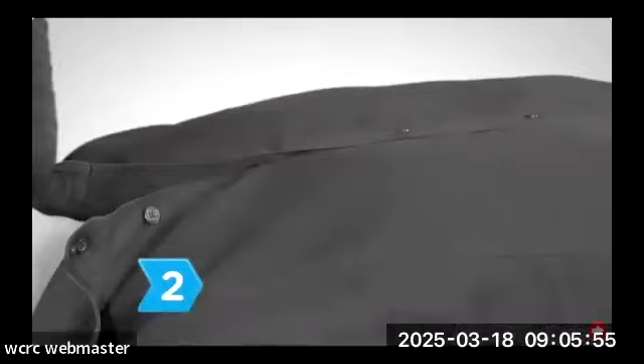Step 1. If you see someone suddenly collapse, check the scene for safety and then see if the person responds by tapping them on the shoulder and shouting, 'Are you okay?' Step 2. Briefly look for breathing. Step 3. If they don't respond, call or send someone to call 911 or the local emergency number right away. Step 4. If the person is not breathing or is gasping, prepare to give chest compressions.

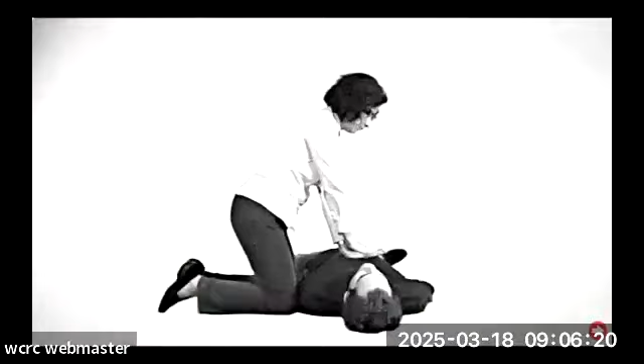Kneel beside them and put the heel of one hand on the center of their chest. Place your other hand over that hand, lacing your fingers together. Position your shoulders directly over your hands, keeping your arms straight and your fingers off the chest. Step 5. Push hard and fast, at least 2 inches. Then let the chest rise completely before pressing down again. Don't take your hands off the chest, just your weight.

Step 6. Keep going. Do not stop compressions until the person shows an obvious sign of life like breathing, the scene becomes unsafe, an automated external defibrillator (AED) is ready, you're too exhausted to continue, or a trained responder takes over.

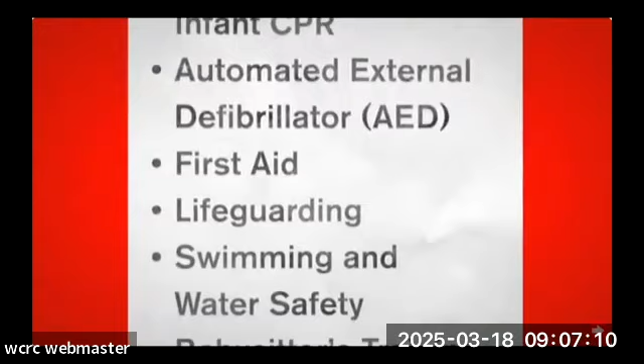Step 7. Get training and encourage others to do so by taking an American Red Cross health and safety course. Knowing full CPR, chest compressions, and breaths will enable you to help in other emergencies such as drowning and choking. Every household should have at least one person trained in life-saving skills. Did you know? Most people who survive a cardiac emergency are helped by a bystander.

All right. It's pretty quick and easy to learn.

Just 2 steps: dial 911, or have a bystander nearby dial 911, and then push hard and fast in the center of the chest. Right around 100 compressions, or 100 beats per minute, is what you're aiming for. There's a laundry list of songs out there that are 100 beats per minute, the famous one being 'Staying Alive' by the Bee Gees. There's a list on both the American Red Cross website and the American Heart Association website to help you get that rate locked into your head.

I do have mannequins available that we could practice on. I'll set those up at my desk over in the administrative wing. So if you want to get some hands-on experience, or just refresh what it feels like for those hands-on skills, I'll be in my cubicle all morning, and I would invite you to come over and check it out.

Craig, could you update the board on the type of training we provide for our staff? Sure. We do a full American Heart Association CPR course, as well as a first aid course. The first aid section is required by MIOSHA, so to maintain compliance with MIOSHA standards, we offer that to our employees.

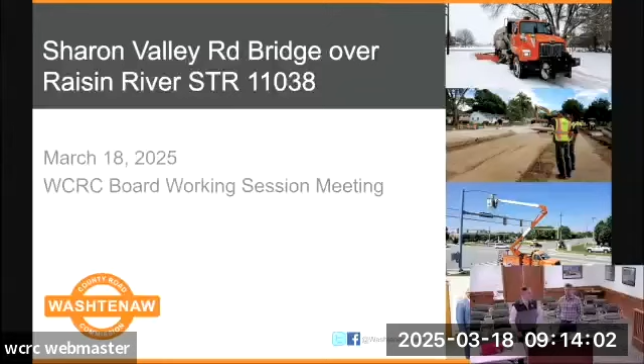Good morning. Aaron Burkholz, Assistant Director of Engineering here at the Road Commission, and Nate Murphy, Senior Project Manager for Design and Construction. We're here to talk about the Sharon Valley Road Bridge over the River Raisin, structure 11038, and give you an update on where we are on the design for that structure.

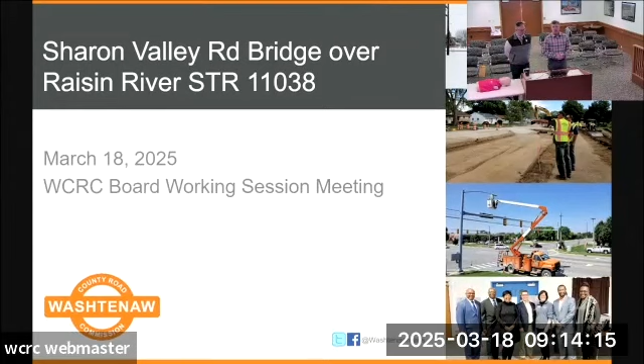Going back in time to when we started this project, we applied for funding through the MDOT local bridge program. This was back in 2021, and through that process we were awarded 1.9 million for the replacement of the structure, to be done for fiscal year 2025. That award included federal and/or state funding sources, and there's also a local MTF match.

So we're currently working toward the design for this one. The MDOT fiscal year runs from October 1 to September 30, so we have to get these monies obligated prior to the end of that season. As long as we're obligated, we're working toward getting the MDOT bid letting in October of this year, October 2025.

For us, that obligation of the funds is when the money is secured, when the money is in the bank. That occurs after we make our final submittal to MDOT, after we submit the final plans, proposal and estimate. Between that time and when the bid is opened is when obligation occurs at MDOT. Again, this is fiscal year 25 funding, and it can include federal and/or state funding for this type of program.

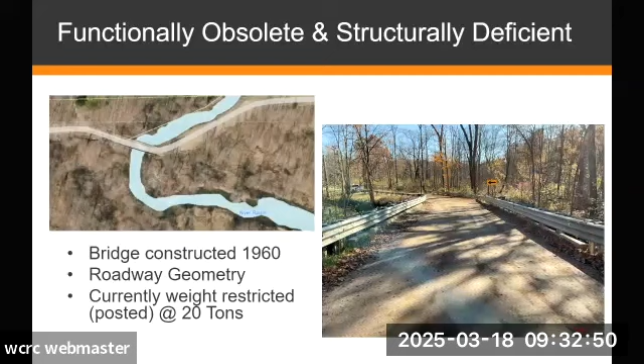The bridge is structurally deficient as a result of the deterioration of the beams. The beams are concrete, and due to the cracking of the concrete in the beams, they have been deemed deficient.

There's also an issue with scour. You can see it in the aerial picture of the bridge looking down on it. As the river comes around that corner and makes that turn, it causes scour around the bridge. That also plays into the fact that we required a 6-month inspection for the bridge.

So it's functionally obsolete and structurally deficient. It does not meet the requirements for either of those. That does present a liability, as Rod was bringing up, that we have a bridge that doesn't meet those requirements.

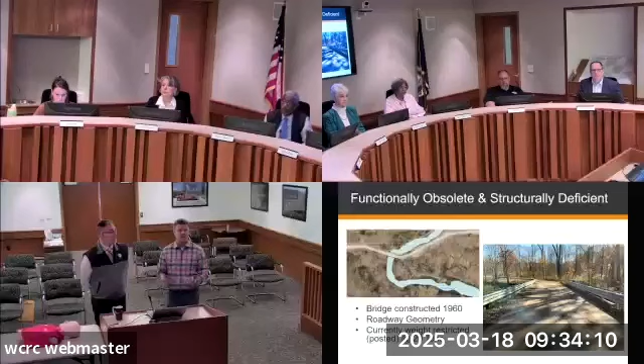So we want to have a bridge that we're not keeping track of every 6 months. The failure that happened in Ohio mandated federally that any bridge over 20 feet in length be inspected every 2 years. We really don't want a bridge that needs to be looked at this often.

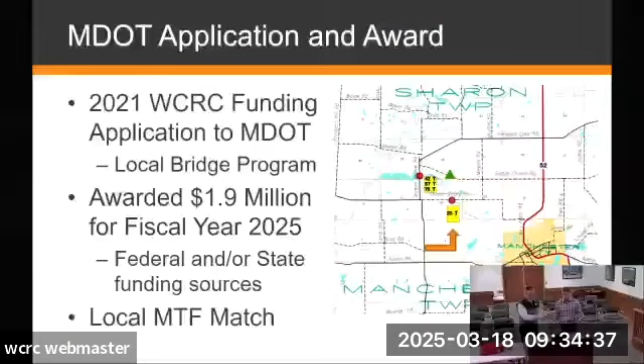So that plays into why we picked this one as well. There's a lot of factors that this one needs help with. One other thing I'll mention is it wasn't uncommon in the past, looking back historically, where...

As they were constructing these bridges, they would look for the shortest span across the river and say, okay, here's the shortest place to cross, that's the easiest way to get across. So we're gonna build the bridge here and then figure out where the roads go. I'm guessing that's what happened here, though I don't know for sure—that's my theory.

For the time this was built, back in 1960, they probably felt it was sufficient. They thought, this is a country road, this will be fine. But as we've advanced to more modern times, we really can't accept a bridge with this type of alignment. It requires a lot of attentiveness on the part of the motorist, coming down a steep hill and going across a narrow bridge, to realize they need to make a pretty sharp turn right off the end of the bridge.

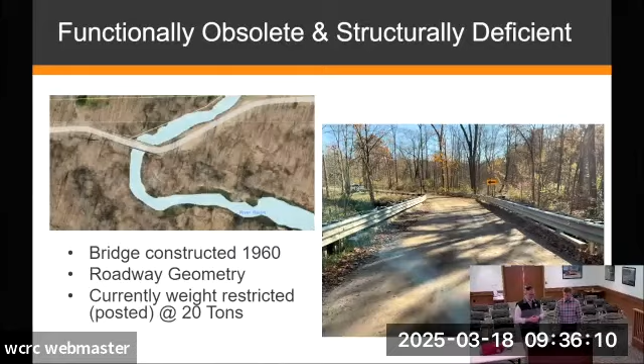We'll get more into the design, but functionally obsolete and structurally deficient are terms we use within engineering. We try not to get too far into the details, but we just wanted to highlight that.

Commissioner, I'm sorry, Commissioner Green? Yes. If someone exceeds the weight restrictions that are posted, is that something our ordinance officers attempt to enforce?

Yes, so if we have a weighmaster in the area and the weighmaster observes an overloaded vehicle, one that would exceed 20 tons, they can stop that vehicle and weigh it. But again, it's very difficult to catch that type of thing, particularly on a bridge located like this one, out in a very rural area.

Usually if we're going to catch an overload on a bridge, it's because it's been repeated over time, and we hear from the public that there are vehicles going across this bridge that appear to be over the 20-ton weight limit, and you might want to have somebody keep an eye on it.

So again, there's that inherent concern that we have a bridge that structurally cannot carry current highway loads, and that's ultimately what we need. Even though this bridge is in a very rural area, you want to consider there's a lot of agriculture in this area, and that equipment can get quite large.

And we don't have a lot of crossings here—we highlighted that in the first slide. There are not a lot of east-west crossings. Unfortunately, we have a closure on Bethel Church just to the north, and the next crossing of the River Raisin to the south requires going all the way through the city of Manchester and across the bridge downtown. So even though this bridge is in a country setting, it has quite an importance to the area and being able to move around.

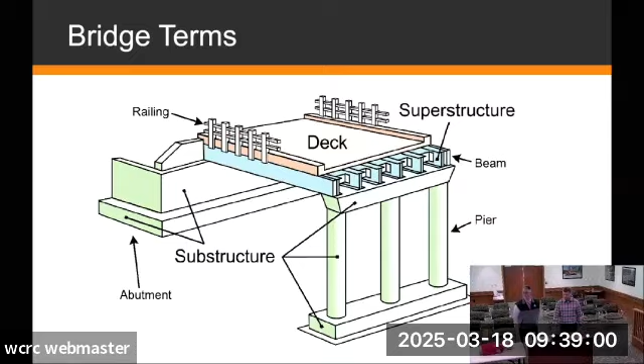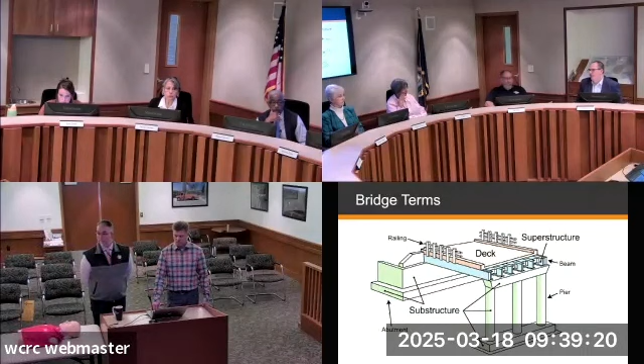Hopefully that clarifies things if we use a term. This bridge, the replacement, will not have a pier, but this is just to show you the terms. We would have a single span structure for this one. A lot of our local bridges are single spans. An example where we do have piers is Dixboro Road by St. Joe's Hospital - probably our largest structure in our system, where we span over the Huron River. It does have multiple piers. But most of our local bridges are single span, meaning you go from one abutment to the other and clear whatever water course you're going over.

To clarify also for weight restricted and bridge scour - weight restricted on this bridge, as I mentioned, is due to deterioration of the concrete beams. The other issue I mentioned was the scour at the abutment. Here's a picture to clarify that. This is not our bridge, but it shows where scour has affected the function of the abutments, and closing this bridge - you can see the water action has removed the backfill behind the abutment. That is the concern we have with this one, having the 6-month inspection cycle.

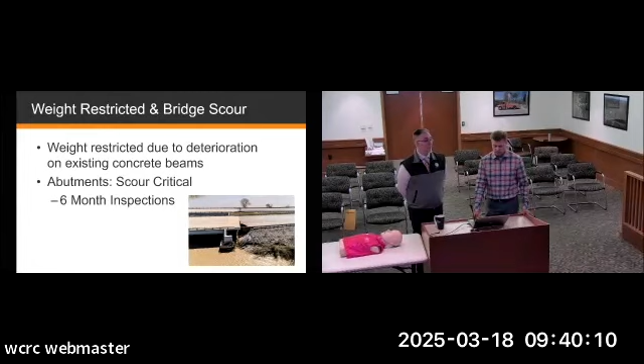In an area where the river turns, much like the one we're citing here, this picture illustrates the power of water, right? The high water levels and velocity can really take a toll on a structure. You can see the water got so high and the scour, as we call it, creates an erosion of the structures behind - this is even behind the abutment. So you're eroding behind the abutment where the beams are performing, but then it risks the integrity of that abutment. The abutments are basically like the foundation of the bridge. So if the abutment's at risk, a lot of our load limiting factors on local bridges are because of the condition of the abutments. That's where scour can be very powerful, and that's where a lot of the guidelines say if there's a risk of scour, you have to look at it more often.

Did you have a question? Yeah, so is this the bridge? No, this is just an example - example of the power of scour. Can you enlarge that picture? Oh, thank you.

This was an extreme example that really illustrated what scour can do to a bridge. There is not this level of scour at the existing bridge on Sharon Valley Road, but again, we just wanted to draw attention to what scour is.

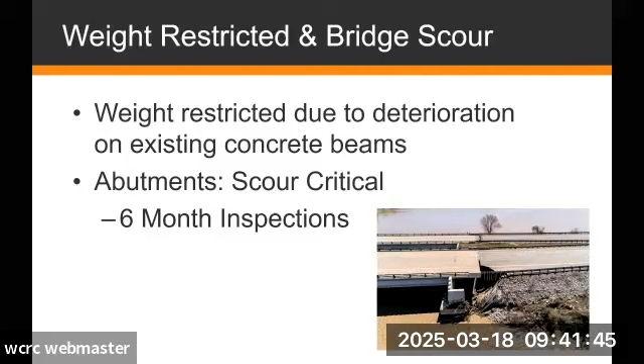Commissioner Green? Yes, what is scour? So scour is basically the action of water, the power of water. As it's going along the foundation of the bridge, it starts to pull material away from that area. Ways in which we account for scour in new bridges as they're constructed is we drive foundation piling - essentially what you're doing is nailing the bridge into the underlying soils. So if there's soil lost around that abutment underneath the beams, you still have those pilings, those foundational supports, to hold the bridge in place. But basically scour is the action, the power of water over time - it's pulling soils away from the bridge.

At Sharon Valley, the existing bridge, as the river comes underneath it, there's a sharp turn, and so you see scour along the outside - we call it the outside of the current. It's working its way around and pulling that material away, so it starts to erode and undermine the bridge foundation. You'll hear the term erosion - that's the one I often hear, and ultimately that's the effect. Thank you, great explanation, thank you.

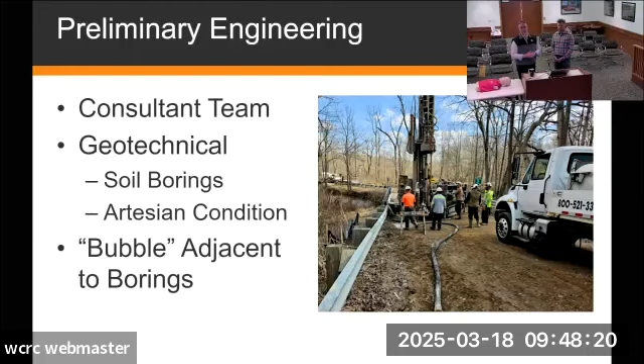Do you know what type of soil it is off the top of your head? Sandy loam? Is it clay? There's a lot of clay, and weathered shale down there, but that's well below the surface. I don't remember all the different layers, but yeah, there's a lot of clay out there.

Commissioner Green, I'm sorry, didn't see you. No, that's okay. So typically the soil analysis takes place prior to the design?

Yes, that's right, because you need to know the bearing capacity of those soils. It's a very important element in the design process so you can properly design the foundation and the abutments. Different types of soils will factor into things like the length of piling you need to drive into the ground. So knowing the soil type ahead of time is a big factor in the design.

Following along with the soil borings, we start working on our EGLE permit. As part of this, EGLE required us to provide several alternates to balance the environmental resources out there, meaning their resources include streams, threatened and endangered species, the river itself, and wetlands. Balancing the impact to those resources is a big part of what they're after. So they required us to provide several alternates for the layout of the new bridge.

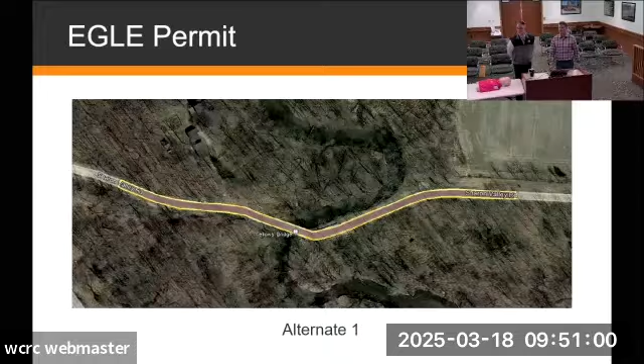You wouldn't have any impacts on the natural features. However, because the funding requires us to meet a low-volume AASHTO road standard, the curvatures need to be enhanced so you're not dealing with all the challenges vertically and horizontally along with the bridge at the same location. So, not a viable option.

We're not trying to design this to a highway standard. They have a low-volume road standard you can use for bridges such as this, where you have very few vehicles using it compared to a highway. So they do relax those standards, but even so, this option does not meet the requirement for low-volume roads.

Alternate 2 is shown here. This is actually the one our consultant and our team came up with as the most viable. This would move the bridge just to the south of the existing one, flattening out those horizontal curves and making a smoother transition between each direction. It takes that sharp curve out, and you can see the bridge is wider. We'll talk about the cross section of the bridge, but it is wider than existing, and that's a requirement of the same standard.

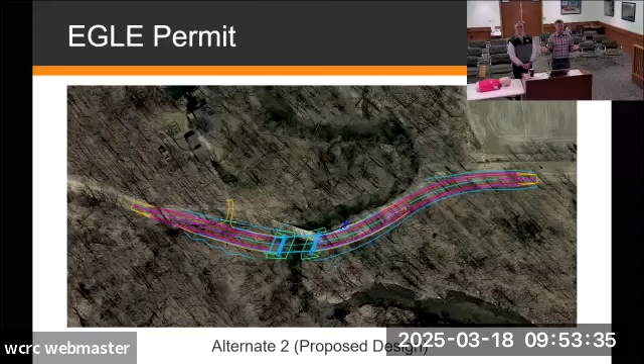As we provided these various alternatives to EGLE, they were reasonable in discussing them and recognizing not only the environmental impacts of a proposal like this, but the cost and the property impacts. So actually, they were pretty good to work with through this. They arrived at the same conclusion that we did, that the design Nate showed previously was the preferred alternative.

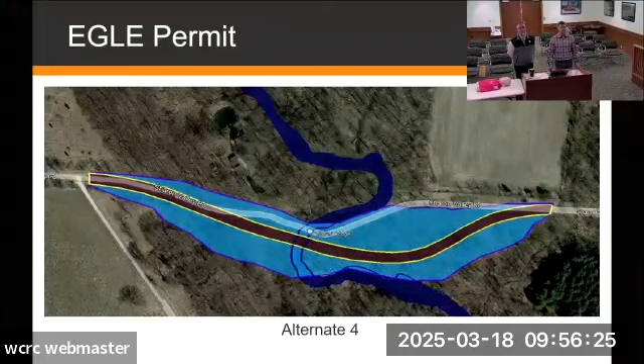The last option that they provided or required was to more or less keep the bridge where it was, but push the curve farther to the east. This one was also a non-starter due to the impact to the wetlands. It just did not work, you'd be taking so much of the wetland that they quickly ruled this one out.

Could you go back to the preferred alternative, just so everyone can see? This one balanced the environmental resources. So we put the bridge in a location specifically for where scour would be less of an issue.

As it comes around that curve, they were able to place the abutments where the design for the scour was minimal. Because as you move it through the different locations in the curve, the velocity of the water changes and causes a different scour function. So they balanced that, they balanced the wetlands, and this balances right of way a lot of it. There's not as much impact to both north and south, so there's a lot of pluses to this one.

As part of the design process, we haven't really talked about it, but we look at the hydraulics of the water course as well. That's a big part of the EGLE permit, is those hydraulics. Yes.

Yeah, the bridge would become, if it was not placed properly, the choke point for the river. And then that causes issues on the river that EGLE doesn't want, and also causes issues to the structure, because you can imagine it becomes like a chute and the velocity increases.

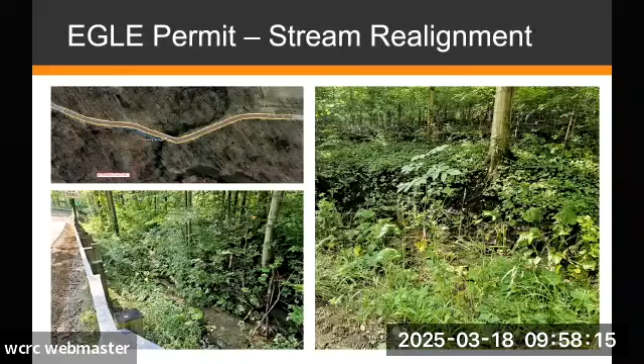Okay, so we looked at these. We also, on the southeast quadrant, there was a stream identified by EGLE. You can see in these pictures, that's why we show them, that it is basically a roadside ditch, but they identified this as a high quality stream. So when they do that, we have certain requirements we have to meet, because we'll be moving the roadway over top of where that high quality stream is, aka ditch.

Nate, was the reason they called it a stream because there was water present? Yes, artesian conditions and the water pressures. So you do have a constant water source, but it's very small. They look at that, and oftentimes our ditches may not have water in them for the bulk of the year, especially the summer months. But in this case, I think some of the artesian conditions may play into their making that a stream rather than a ditch.

On the southwest quadrant of the bridge, there's a pretty steep hill that goes down there. All along that hillside, water is coming out of the hillside, so it's either running off of the field to the west, or it's just coming out of that slope. Water's everywhere out there, so we put a ditch there.

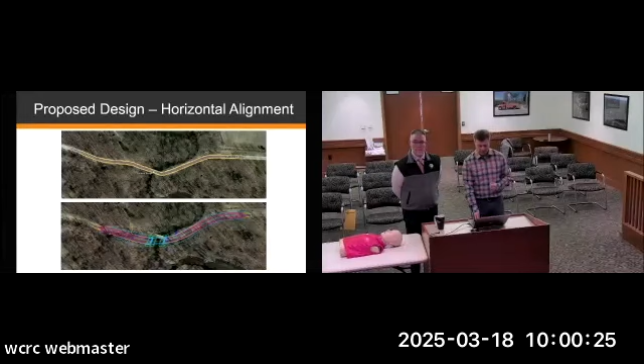Here's a quick look at existing versus what we're calling proposed. The proposed bridge, you can see the horizontal geometry is improved drastically for safety for the user. Also, having a hard surface to go through those curves, with it being a soft surface road, as we all know, cross slope changes over the course of weeks between gradings. With it being hard surface, it can be super elevated properly, and you can navigate those curves with confidence, because the friction is going to be there to navigate you safely through those horizontal curves.

Looking vertically at the vertical profile, this is a cross section of the road along the center line. It's exaggerated, so it's stretched. If you took the actual curve and stretched it, it gives the engineer an easier time of calculating elevation. So it's just a quick look at us smoothing out that curve. It's not that ski slope that you see there, it's because it's stretched vertically. But you can see that if you've driven that road, it is much improved from the existing vertical curve.

Apologies, because for Nate and I, and even Matt, because he's an engineer as well as being a managing director, we look at this and it totally makes sense to us. We're like, yeah, oh yeah. But it's skewed because of the scale.

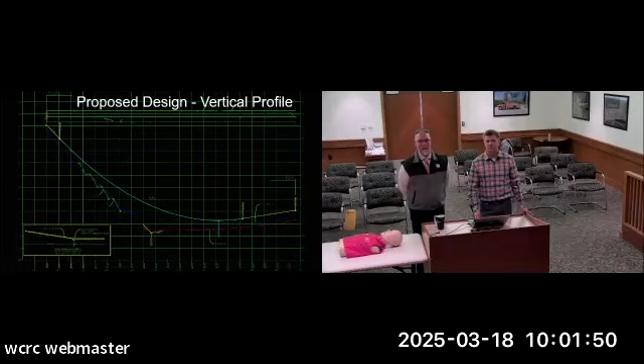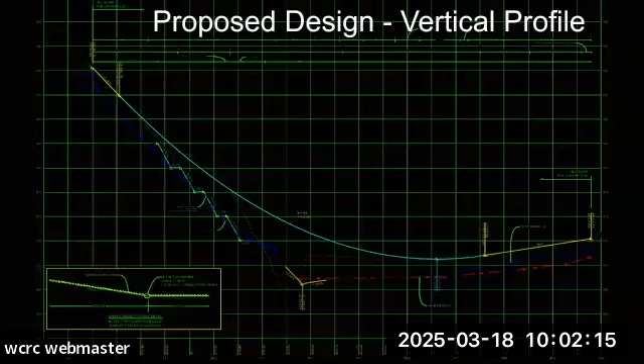The boxes going from the bottom to the top, that's 5 feet, so each box is 5 feet. So you have to think about, as Nate said, it's not a ski slope like it looks there. We just wanted to illustrate some of the design work that we do, that we work with our consultant on, trying to smooth that vertical curve going from high to low, to the benefit of the motorist, to provide a safer means of navigating this bridge crossing.

In this vertical profile, you also see we're managing the drainage as well. You see the ditches in dark blue and magenta, and you can also see that the low spot is not where the river crossing is, it's actually to the east. That helps manage the water, because we don't really want water on the deck of the bridge. We want to manage that, and also manage how it gets to the river as well. So a lot of thought goes into this.

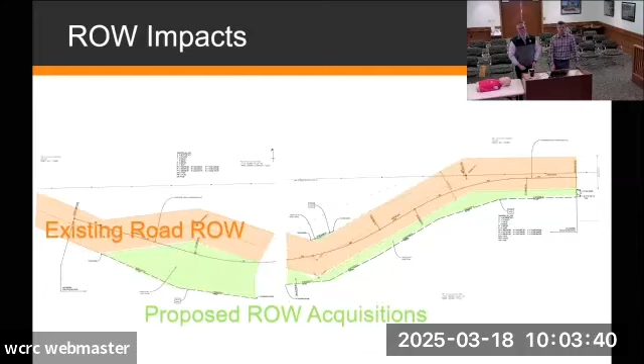Normally that right of way generally follows the center line of the road, and because this center line is so out of line, basically the right of way follows that. So for us to smooth those curves horizontally and go back to that preferred alternative design, we have to acquire right of way along the south side. You can see it better on the screen behind you, but the light orange is the existing right of way, and the green is what needs to be acquired. As part of the obligation process, you've got to have the design done, the permits in hand, and right of way acquired. So that's all work in progress.

That will also open it up and keep the pavement more dry, for the longevity of the pavement. It dries out, it'll melt the snow faster. It's just much better for the road surface and the bridge surface to have it, for the longevity of it.

As we talked about, as we looked at alternatives with EGLE, certainly one of the things considered was the number of tree removals needed, but that was only one of the environmental resources factored here. We had to consider trees, the River Raisin, the wetland areas. We also, which is common when we get into bridge construction, have to consider the fish. You have to consider, this is an area of migratory bats and birds.

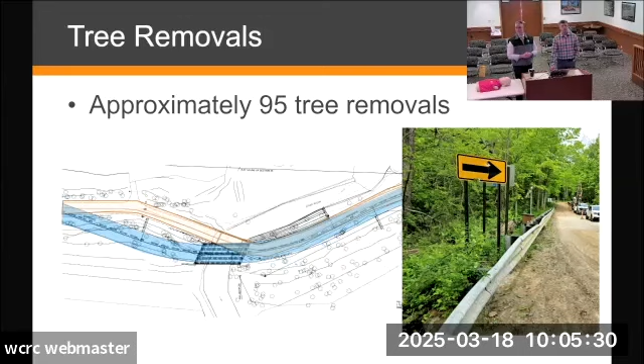There's a lot of environmental factors considered when you're building a bridge. EGLE was in discussions with us about this, so we're aware of the fact that 95 trees need to be removed, but again, all things in balance, this is the best alternative. Don't forget the mussels in the stream as well. It is a big issue when we're getting the EGLE permit, and Nate will probably get into that.

Does the old road then just go back to green space afterwards? Yes, that would be obliterated. It would just be sloped and planted with grass. So it's just a trade-off, really. It's not new. It will still be public right of way, but without the road, so those 95 trees can grow back over time.

It's not cemented right now, correct? I think it would be HMA, hot mix asphalt. It would be an asphalt driveway approach. Okay, and it goes up to the right of way.

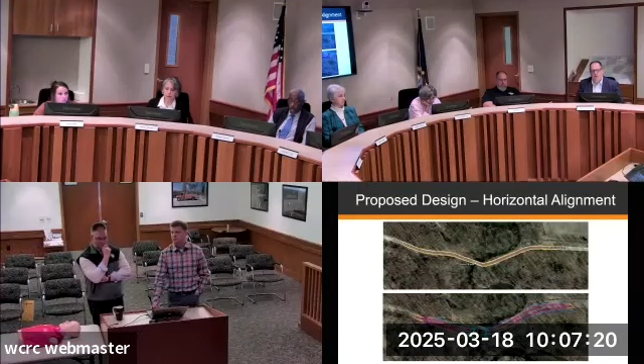It doesn't go beyond. It's weird because our right of way jumps to the north there, you can see how it turns to the north. So that's why the driveway goes up that far into that space. And that's typical practice, if it's a paved road, we end up doing a paved approach, and we'll take care of it all the way within the public right of way.

So have we acquired the land yet? No, we're in the process of making a good faith offer. So ultimately what they do is see, all right, this is what we need to acquire. Then we have an appraisal, and the appraisal gets reviewed by another appraiser just to make sure it's current fair market value. And then ultimately Kurt Brochet, who works with Nate and Aaron, would make a good faith offer to the property owner. Oftentimes they'll counter, and we'll review. Then ultimately it comes to the board for consideration and approval.

So EGLE gets concerned with the amount of trees that are removed? They do. That's one of the things that they would consider for a project like this. Among the many environmental resources here would be tree removals. Their primary focus there is migratory bats and migratory birds. So they would look at that, but again, that's in balance with the fish, the mussels, the river, the wetland areas. Those all are factors in identifying what the best alternative is.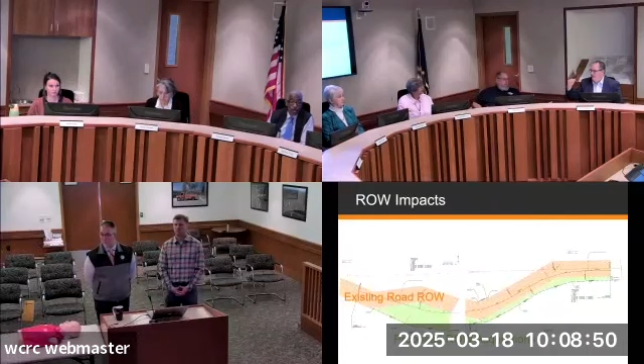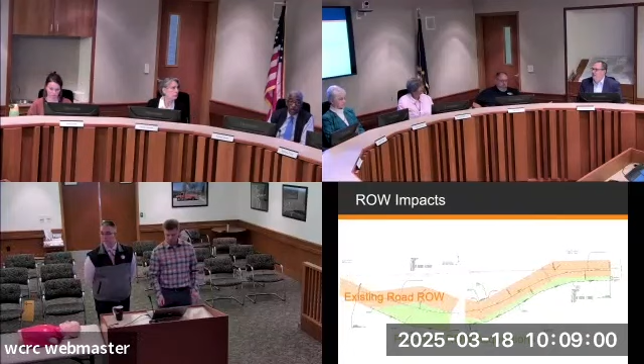In terms of priority, high priority is placed on the stream or river, wetlands, and then obviously other environmental factors like threatened and endangered species that they were talking about. But it is a balancing act. When we're looking at new infrastructure, there's going to be an impact, so how do you best balance those impacts?

As we move forward into the design, this is a cross-section of what the abutment design would need to be, just to illustrate the complexity of what we're dealing with. As I mentioned, that artesian issue found during the soil boring exploration identified a pressure underground for that water resulting in a pressure head of around 18 feet above the existing ground. So that means if you drove a straw into the pressure, there would be a point at which the top of the straw could be high enough that the pressure would equalize and the water wouldn't continue to come out.

So what we're trying to balance is, while we're building this abutment, getting the foundation substructure built without water going everywhere. So if this is a cross section, a slice down the center of the road at the bridge, this is the abutment right here, a cross section of the concrete abutment. Underneath are piles, steel piles, pounded into the ground. There'll be pictures. Yes, this is very engineering-esque.

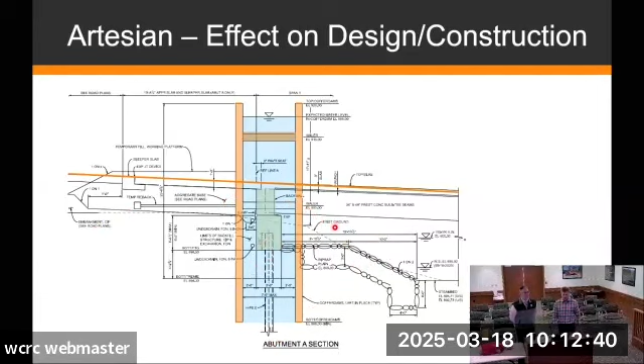And this kind of talks to what that is. So what is a cofferdam? This is a picture at Dennison Road we built back in '21. You start by installing these interlocking steel sheets, and you pound them into the ground, and they all interlock and make a perimeter around where you're working. You can see in the foreground these guys pouring concrete around these piles, the piles that have been pounded in to support the abutment. So you start with that perimeter sheeting in order to make yourself a dry work area.

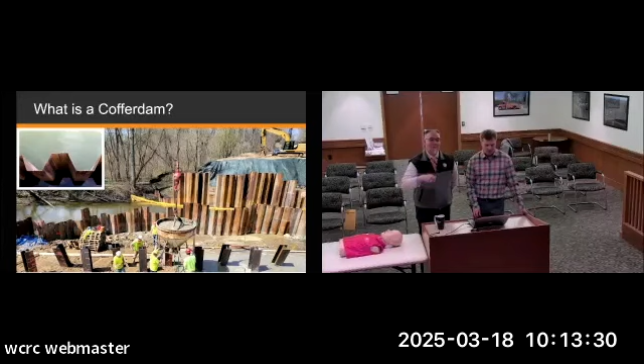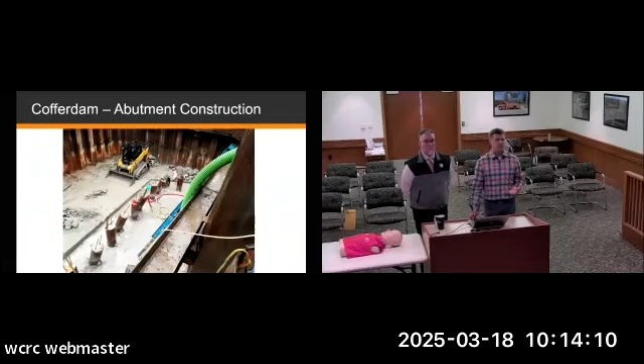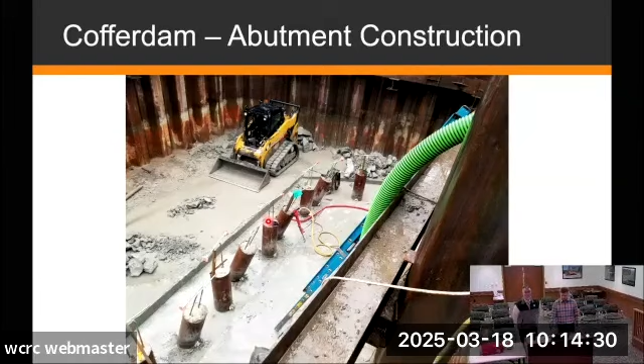Then we eventually had a specialty contractor come in and stop that water flow. This is a picture after they had removed the water inside that sheeting perimeter, the cofferdam. They successfully plugged that artesian flow enough to be able to continue their construction. Any questions on that? Commissioner Yamas?

Out of curiosity, I used to walk along Geddes Road, that park by Huron High School. Did they do this around there? I saw some cofferdams there, I think. You'd have to build that. Well, when we worked on the Dixboro Bridge years ago, almost 20 years now, the big bridge near WCC.

Oftentimes you'll see interlocking steel sheeting put in like this along rivers. Again, it can prevent scour along a river, driving a long steel sheet into the ground, down into the soils, to basically prevent water from causing erosion along the stream bank. In the case of a bridge, you're creating that enclosure so you can perform the foundation work.

Reflecting back on the Dixboro project, that one also had artesian conditions underlying, and we factored that into the design but also had to deal with them during construction. There were areas on Dixboro where the water would just come out of the hillside, and we see the same thing on Sharon Valley Road, where the water just finds its way out of the hillside.

Commissioner Smers asked: how many feet below the deck do you think you're going to be with foundations on this thing? How far below, how many feet below grade for the piles?

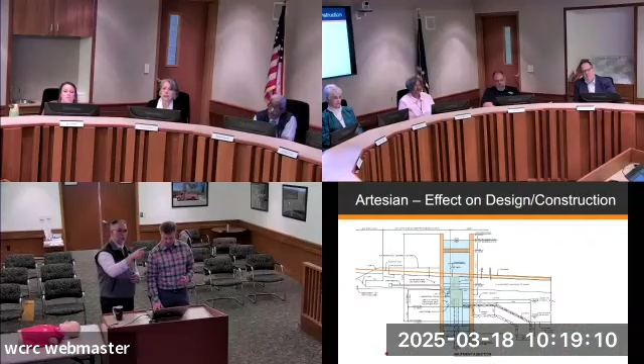Commissioner Green means the shape of the cofferdam sheets. Oh, I thought you were talking about the shape of the pile. I wanted to know that. Why aren't they just flat? Because they're nerding out on it here, and loving it. They're interlocking, so why are they shaped the way that they are?

You're seeing corrugated cardboard - that inner layer gives it rigidity, makes it stronger. Back before corrugated cardboard, it was just a solid thick piece, which took a lot more thickness to get the stiffness you'd want in a box. So they came up with putting a corrugation in the middle, making it a structurally improved section using less material. This makes it much more rigid horizontally, so as you pound it in, it's needed to support that soil or the water. A thin sheet versus a thicker section gives you more rigidity and flexure ability to resist that horizontal force. Does that make sense?

You just thought of the corrugated cardboard thing, right? Well, it's the same thing. But you just standing here, thought of that? That was really good, I wouldn't have thought of that. Yeah, the corrugated cardboard thing - I think that's really good.

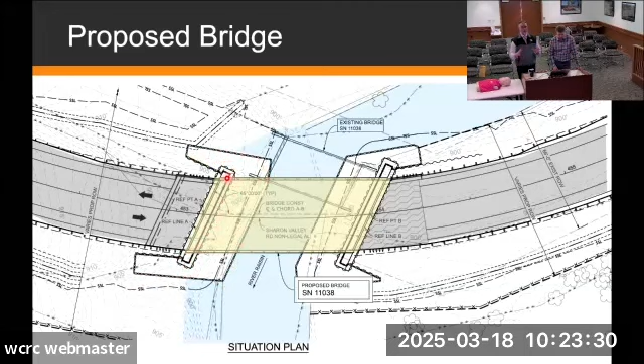Riprap is basically large stone that we put in place. If you look at a modern bridge, you'll see large limestone - we call that large stone riprap. It's protecting that foundation from scour. As water comes through the bridge, you're breaking that water up and taking the energy out of the water by making it run along that rough, angular stone surface.

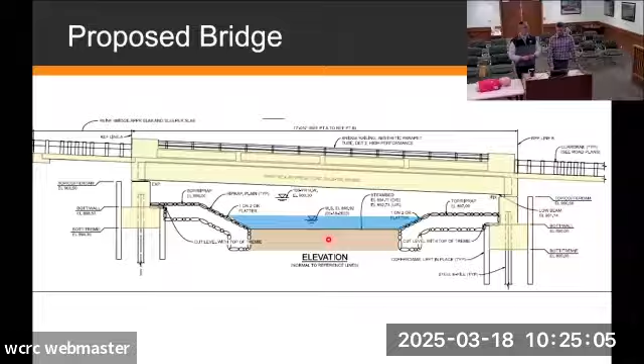And the proposed bridge for this one, for Sharon Valley, will be 73 feet. So a little bit shorter, but very similar.

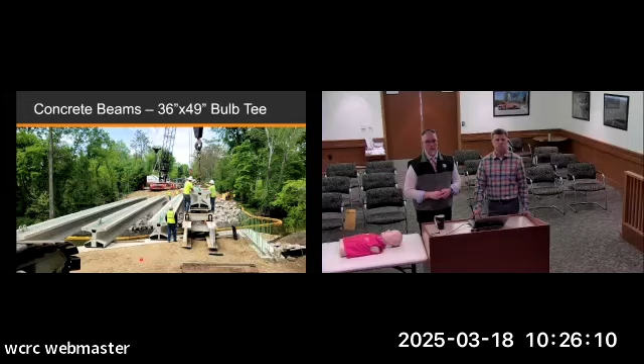And the beams, you can kind of see how they look like they have a curve in them, and we call that camber. That's designed into the precast beam when it's built in the plant, giving the beam a bit of deflection. When you put the load of the concrete deck on top, the beam comes down and settles into its final position.

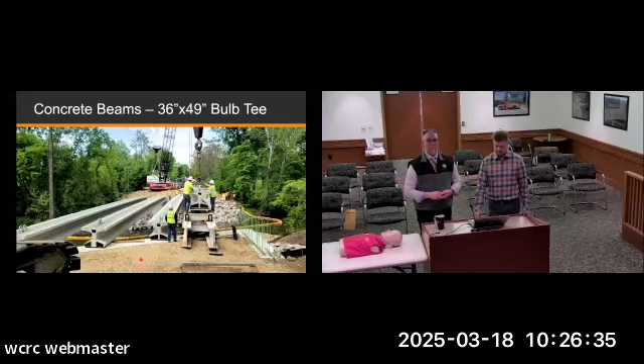It's a big day when you're setting beams, everybody's on site for that. After the beams are in, then we add formwork and reinforcement for the deck.

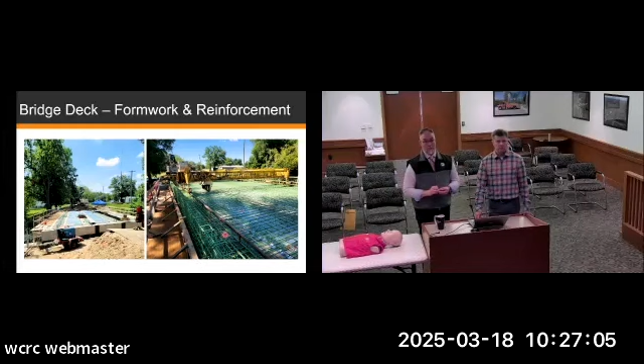Then the deck is poured, and they use a piece of machinery to help get the top of the deck smooth and at the right elevation. It moves along from one end to the other on tracks so they can get that top surface nice and smooth, following the profile of the road we want to create.

The pouring of this much concrete is significant because it's a fairly massive amount of concrete, even on a relatively small bridge. Decks are typically about a 9-inch thick concrete deck.

You have to be very mindful of temperatures anytime you place concrete, and of the weather conditions overall. You don't want freezing temperatures, you don't want high temperatures above 85, and you don't want to get caught in the rain. There's a lot of preparation that takes place, a lot of checking of the weather forecast. For bridges constructed during the summer, oftentimes they'll do the bridge deck pour during the nighttime hours. That was the case on the Dennison Road Bridge in York Township, they actually poured that concrete deck overnight because that's the cooler part of the cycle.

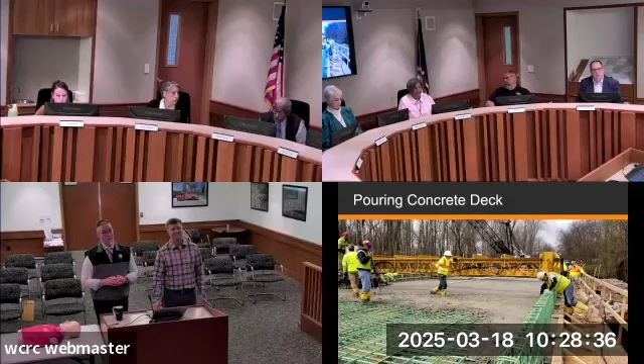So, Commissioner Green - so we use asphalt on roads. I'm assuming asphalt will absolutely not work on a bridge. No, it will not. We do have maybe a couple bridges built in the past where they would set what they call box beams side by side, and then pave an asphalt deck over the top.

That's a bad idea. I'm sure they had reasons for doing it in the past, but asphalt is inherently flexural, so it moves a lot. Well, the bridge is intended to move as vehicles go over it. When you combine a moving bridge with flexible asphalt, the asphalt immediately starts to crack and come apart, and it doesn't contribute structurally to the bridge. It doesn't make the bridge any stronger.

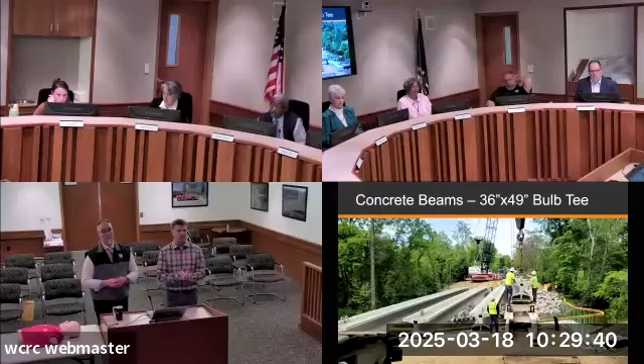Actually pouring a concrete deck on the bridge does contribute to the overall structural integrity. Concrete is a composite material - our concrete deck is a composite material. So what we're taking to build it, you can see the beams are not next to each other - there's a gap. So we're asking that concrete deck to carry the load of the vehicles, meaning it's a structural element. As part of that, you have to have a composite, which would be the concrete working with the ability of the steel to carry that load, both compression and flexural, is what we call it.

So the asphalt is not able to provide any kind of structural capacity for that. Yeah, the asphalt doesn't have the rigidity of this structure where you've got the reinforcing steel, and concrete alone is a rigid pavement as well. So you combine those two, and that's really what gives it its structural component.

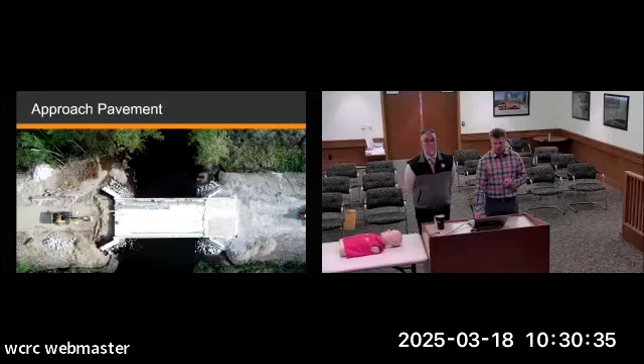After the deck is poured, we move to getting the approaches in. This again is the Sharon Valley Road Bridge to the west - they're preparing to put the approaches in. And then after that, we pave in the road, and this will be very similar to what the proposed bridge we're putting here for this one. It'll be very similar to how this looks.

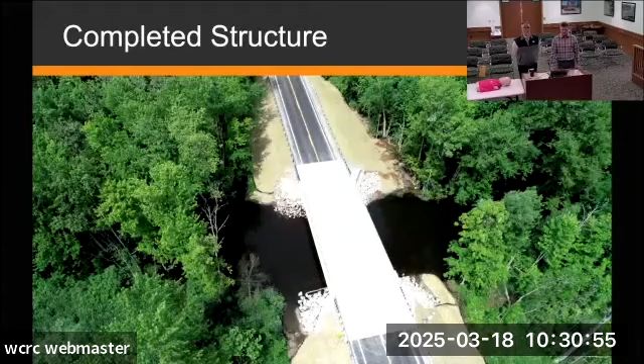So you'll see also you have approach slabs as well - a concrete slab right before the bridge deck that transitions to the asphalt pavement. Got a guardrail - yep, so considerable guardrail goes in, because you're protecting traffic that might leave the traveled way, go beyond that white line. You basically are redirecting that traffic back onto the road, back onto the bridge, because there's concrete barrier on the bridge.

And for good reason - you don't want someone driving off the edge of the bridge down into the water. But where you have that transition, the end of that concrete barrier, we don't want a vehicle impacting the very end of that barrier - we actually call that a coffin corner. If a vehicle hits that concrete, it immediately comes to a stop, and that in all likelihood is going to kill the occupants of the vehicle. So there's a lot of thought and design that goes into the guardrail approaches to try to, as best we can, protect the motorists.

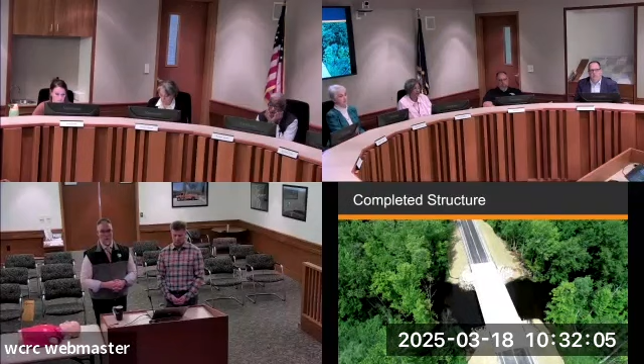We will be requesting additional funds from the local bridge program. We have already communicated with them that this is a possibility. We didn't know the number, but we knew that it was going to be higher than what the submittal was for the application. For that application, we used a regular average unit square footage cost that MDOT has used for years. They've dialed that in pretty well for their highway bridges - that gives you a pretty close estimate.

But when you add in all of the issues that we have here, they're non-standard issues, that causes a lot more cost to be incurred. And Matt had brought it up earlier that when we made the application for this bridge back in 2021, it's a planning number.